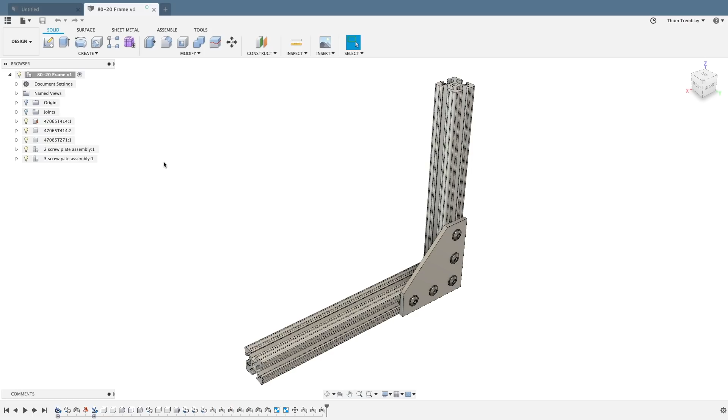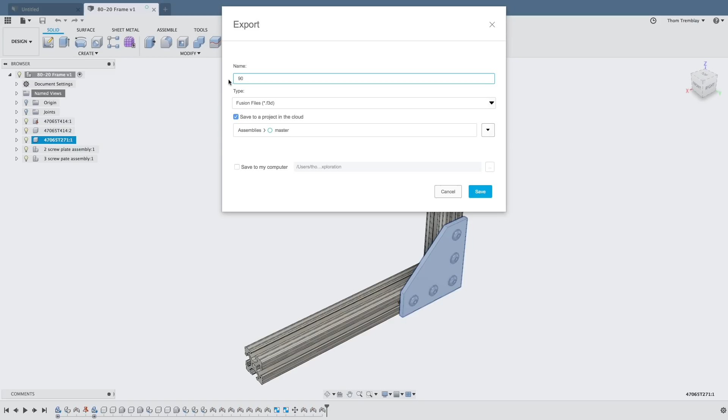Find the plate in the browser, right-click, and select Export from the context menu. When the dialog opens, you can see that we can export a Fusion Archive file out to a local folder, or you can select to save it to the project in the cloud. Rather than using the standard part number, we'll give it a more common name and save it.

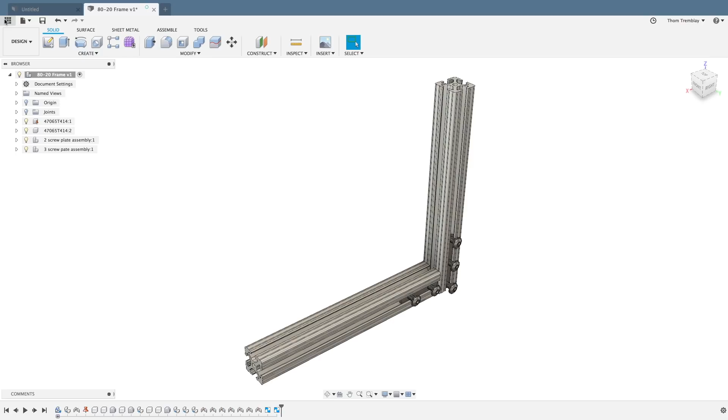At this point, nothing has changed in this design. However, we can now go ahead and take our local plate, delete it, and go to the project. Here we'll see our 90-degree plate. Let's double-click and open this so we can see that the bodies are local to the component.

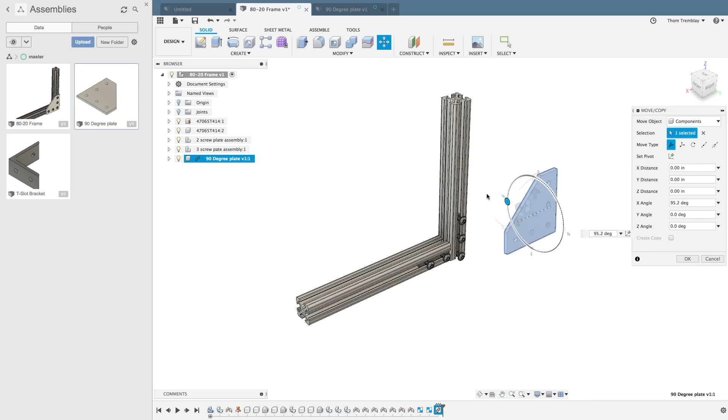Now let's return to our assembly, right-click on our plate in the project, and select Insert into Current Design. We can position this, we can apply joints, whatever we need to do to use this plate in the same way that we did the local version. You'll notice that in the browser a link icon appears to let you know that this is external data. Let's see what happens when external data is modified.

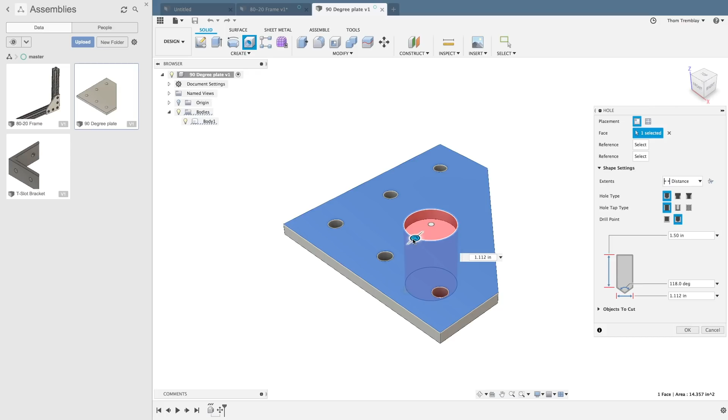This plate could be used in dozens of designs. If you wanted to reduce weight, you might consider adding a hole to it. With the change made to the design, and the design saved and updated, once the new version appears in the project, any design file that you open that utilizes this plate will be updated.

Since our current design was already open, I'll need to update it manually by selecting the link icon at the top. When I do, I can see that the hole has been added and the design is up to date.

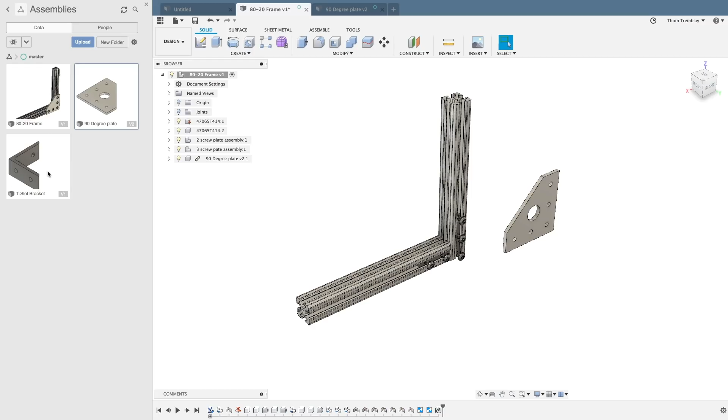Now let's take a look at the T-slot bracket. Let's insert it into the design. Again, we can reposition it and rough in its location. And of course, this component will behave exactly the way our new 90-degree plate does, with this design being updated anytime that component is modified.

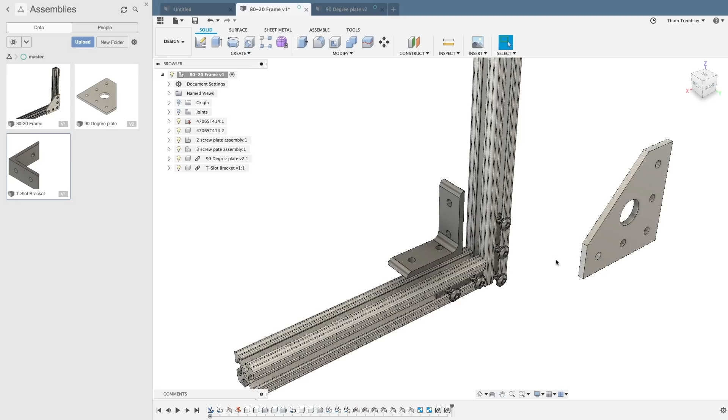However, for now, I'd like to make a modification that would be unique to this design. To do this, we can go to the browser, right-click, and select Break Link. Once the link is broken, this is now a component that's local to the design and can be modified in the exact same ways you would have modified it before, without changing the source data that's being used in other designs.